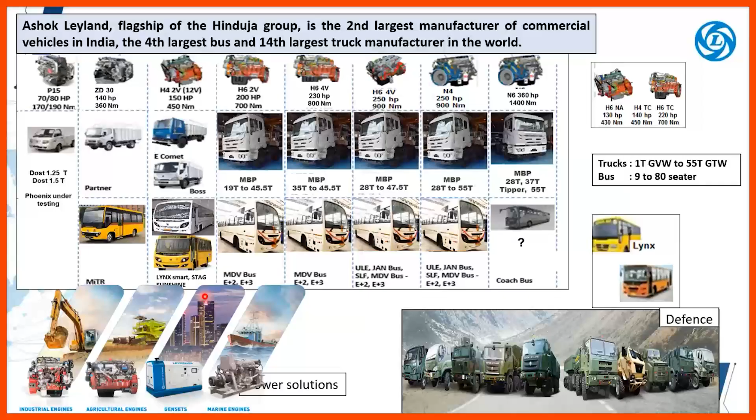So in PSB, we have four major verticals. We have one vertical for the industrial engines that goes for all the industrial applications, compressors, earth moving equipment, construction equipment, and so on. Agricultural engines that primarily go on the harvesters. You have the gensets. I mean, we give the engines to our OEMs who build the gensets around the power pack, and the marine small portfolio we have.

So now CO2 reduction. We all know why CO2 is being talked about. CO2 is a powerful greenhouse gas. It's already created a hole in ozone, and it's going to create global warming, right? That is the reason why everybody talks in terms of this language of CO2. A lot of countries, especially in Europe, have taken their internal targets, like 15% by 2025 and 30% by 2030 with respect to the 2019 baseline.

And there are a lot of technological pathways also being mentioned, how to do it. It's not just about doing what is required. It is also about how one would do it. It doesn't stop there. If somebody does not conform to that, then you can see the penalties that would be levied for non-compliance. And the penalties would sometimes make even the companies bankrupt. It's a very, very tight penalty.

CO2 reduction at an R&D level could be very easy, right? We can put a lot of technologies inside and then get the CO2 reduced. But if you take it for commercial viability, ultimately what could happen is the product cost would go up, right? And product cost going up means this is a burden on the end customer. So we should find smart ways and means of achieving the objective with minimum cost addition to the end product. So that's where the challenge lies.

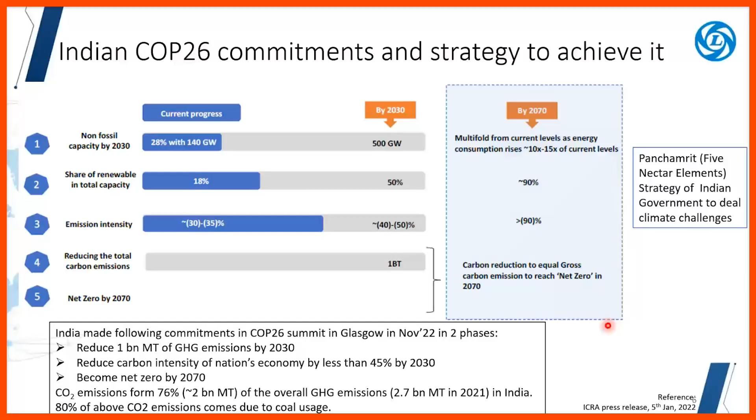At the end of the day, the fifth line item is net zero by 2070. So by 2070, the Panchamrit elements listed here will try to get us from a baseline level to net zero levels. This is a very, very challenging target. I've mentioned the reference from where these slides have been taken so that anybody who wants can refer to the authentic source.

Similarly, based on the Panchamrit, how do we do it? One is the renewables, next is the EV ecosystem. When we say EV ecosystem, availability of EV vehicles and also the charging stations and the swappable batteries and so on. Next is ethanol for petrol, E20, and ED and MD, that is a 10% or 15% mix of ethanol or methanol or even IBA, isobutanol, at 10% levels for diesels. Besides this, green fuels. Next is battery energy storage improvement, and CCS, the carbon capture and storage technology. These are all again expensive technologies.

So at the end of the day, the details are mentioned here in this ICRA report, and by following these steps, we should be able to achieve the targets set by our government.

For India, let me start with the non-powertrain enhancement. Non-powertrain is basically the non-engine and non-gearbox stuff. First is aerodynamic optimization. Most important in aerodynamics is a streamlined body. Vehicles may have a roof hat or something like that to reduce the air drag. A lot of CFD simulations are done upfront during the vehicle design itself, and then the best design for the vehicle is selected for getting the CO2 benefit. This is not very new; we've been doing it for quite some time.

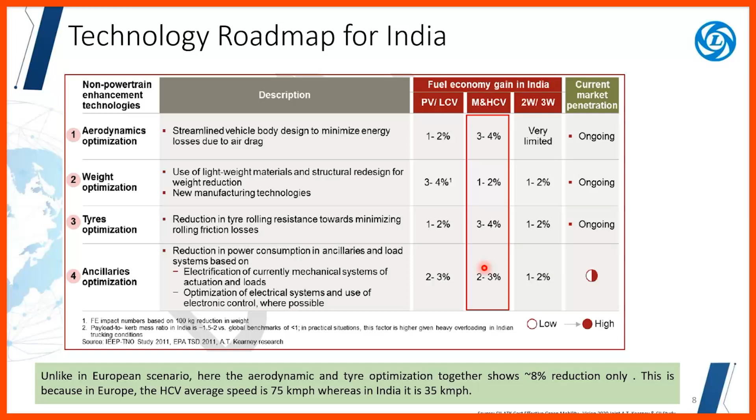Yes, sir. And now, if I continue the technology roadmap, friction reduction is a very important thing that every engine designer does. As you know, friction is proportional to the square of the engine RPM.

So if you are having a high-speed engine and if the friction levels are, somebody can go on mute, please, whoever is talking there. Hello?

So friction is proportional to the square of engine RPM, square of engine speed. So in any high-speed engine, if there is a friction element sitting inside, it's going to be detrimental and it's going to stop getting the fuel efficiency benefits. It's going to deteriorate the fuel consumption. Similarly, micro hybrid stop-start systems, then fuel injection systems. So everything will have a boon and a bane. One is the cost part of it. Next is the technological challenges in manufacturing, assembling and maintaining the same thing.

Next is downsizing. So how can you push more and more air inside the engine with a downsized engine? It means if you have a naturally aspirated engine, say for example a 4-liter naturally aspirated engine, can we go to a 1.5-liter turbocharged engine? That would give a specific power very similar to the 4-liter engine. Yes, people are doing it, and this is the idea most people are working on. How can we squeeze the maximum power out of the engine? Smallest engine, maximum power. Other technological elements like variable valve timing and variable valve lift, right?

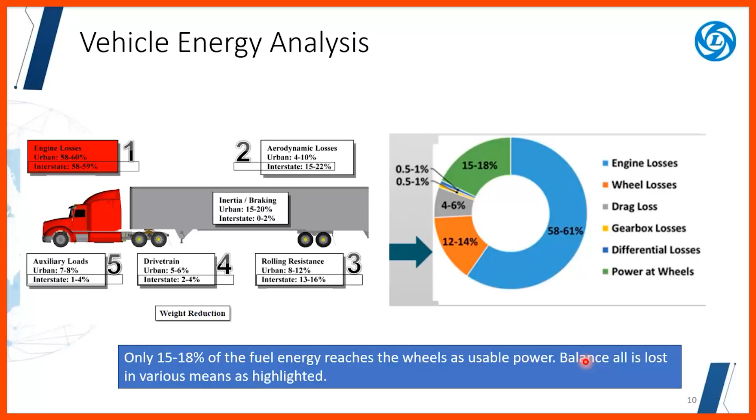And there are some resistance components that are going to eat away the hard-earned energy, right? The driving resistance, aerodynamic, the rolling resistance. There are some driveline losses. There will be some thermal losses. So it's very important how we can recover the thermal losses. So can we do something to recover the exhaust energy and again use it back? This is an Argonne Lab presentation.

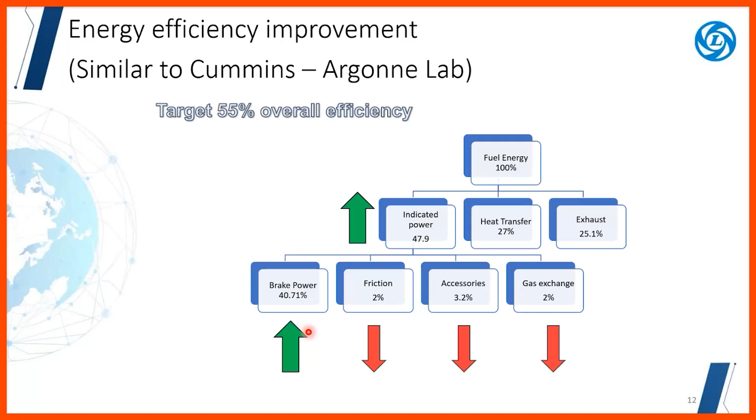So what is being mentioned here in this slide is fuel energy going to indicated power, heat transfer and exhaust. How can we threadbare analyze the energy constituents, where all this energy is going as, if I can use the word, waste, and how we can address it, and then how we can improve that wastage so that useful energy is realized, and therefore, at the end of the day, the overall CO2 gets improved.

Cummins had built a vehicle many years back targeting 55% overall efficiency. 55% is a very, very challenging number, and they've achieved it on one vehicle. There are some papers and literature available. If somebody is interested, you can go through and find out how they managed. What are the techniques that they adopted to get that very high fuel efficiency? Some techniques are mentioned here: the ORC, insulation, friction reduction, auxiliary loss reduction, the variable geometry turbocharger, redesigning the combustion chamber, very high pressure fuel injection, and taking the engine to extremely high cylinder pressures.

So there is the European standard, and based on that, what all can we do, right? This is an AVL source slide here. What they said, which could be pretty realistic, is we can achieve about 15% fuel efficiency improvement from the baseline level where we are. But for that, plenty of work needs to be done here. It's not one element or two elements that we do and it's going to give the ultimate result of fuel efficiency improvement. So there's a whole lot of activities that need to be done.

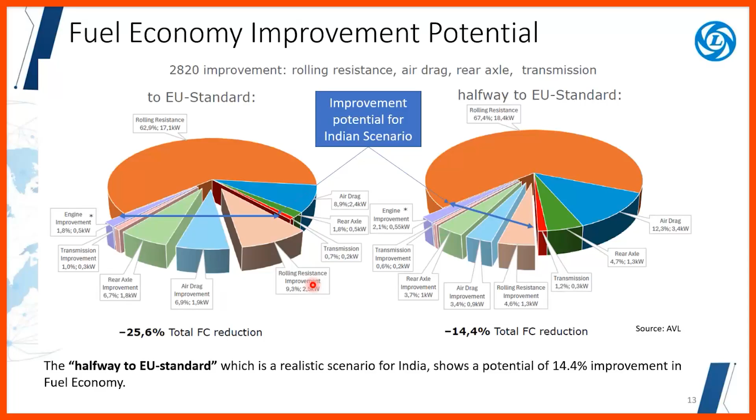And the most important is it has to be realized on a mass production level. It means we need to do a lot of consistency trials. The parts that we source, the technologies that we source, they have to be extremely consistent. Otherwise, one customer may get it, the other customer may not. But at the end of the day, when these things become the rule of law, it has to be met. There is no other option, right?

So in engine efficiency, how can we improve the efficiency of an internal combustion engine? First, you can improve the combustion and air handling. When we say combustion, a lot of software is available in the market to model the combustion and get the best combustion chamber design. When we say air handling, that also talks about turbocharger.

Have we selected the right turbocharger, right turbine, right compressor combination for the particular operation of the vehicle, of the engine? Is there any possibility that we can recover the exhaust heat, like an organic Rankine cycle? Can we recover the exhaust heat and then use the heat for some other purpose?

At the same time, you can thrift some fuel. It means there is over that, so that amount of fuel consumption can be again thrifted. So how can we reduce the heat loss? Heat loss to various sources like heat loss to coolant, heat loss to exhaust, and so on and so forth. How can we improve on the friction and the parasitic load? This is again an important thing.

At the end of the day, how can we optimize the engine-out NOx emissions? As I mentioned, NOx emissions is a direct function of your thermal efficiency. So can we do something, deliberately increase the engine-out NOx, get the best thermal efficiency, and have an aftertreatment system that is wonderfully designed so that the NOx emissions are addressed, treated, so that the compliance, everything is met.

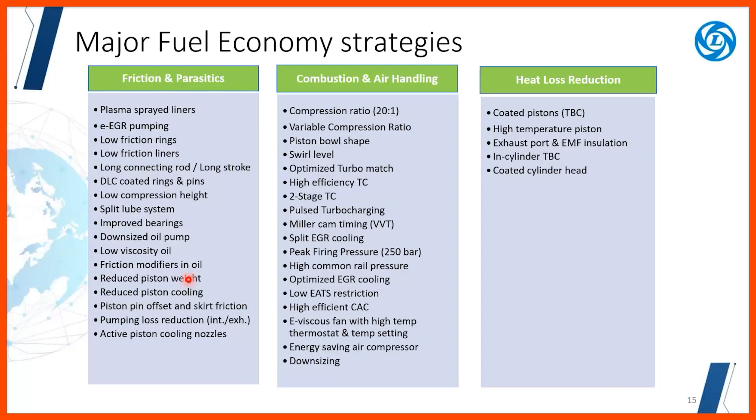And another thing is, can we use some wonderful oil? Very low viscosity, high performing oil so that the friction contribution from the viscous oil is negated. So there are many ways it's being done, but end of the day, we have to do these things, otherwise the end goal will not be met.

Again, FE concepts for enhanced BTE, brake thermal efficiency. So what all can we do? For example, there are some companies who do this. The super truck program targets 55% brake thermal efficiency using various techniques. Typically, diesel engines have compression ratios of the order of say 17, but here people are going for 20:1, so you increase the compression ratio.

Similarly, cylinder pressure, very high common rail pressure, injection pressure, and restriction in the exhaust side is very less. It means you are reducing the back pressure because back pressure is going to affect fuel efficiency. Can you do downsizing? So many ways are required here. This is an open book, you can search on the internet. And if you look at the Cummins Super Truck program, you will get plenty of information on the internet also, so that we can revisit these ideas later.

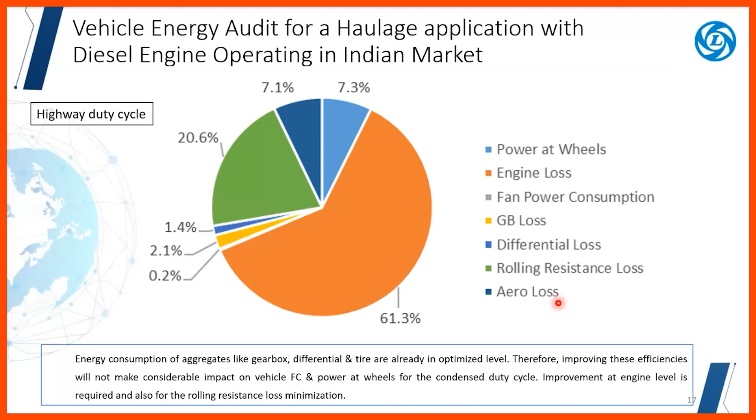If you typically look at a haulage application market, and a diesel engine is operating, typically the power that is coming at the wheels is very less. A lot of losses are going on. So every single component in the engine, in the gearbox, that's the transmission, in the propeller shaft, in the differential, and in the tires, everything has to be addressed. Not just the drivetrain, also the aerodynamic losses and the overall mass also has to come down.

So this would require a complete collective effort at an organizational level to realize these benefits. And similarly, once we do that, improvements can be realized, yes, but one may not get an improvement of say 15%, 20% levels. Even a 4%, 5% improvement is a big number in these activities.

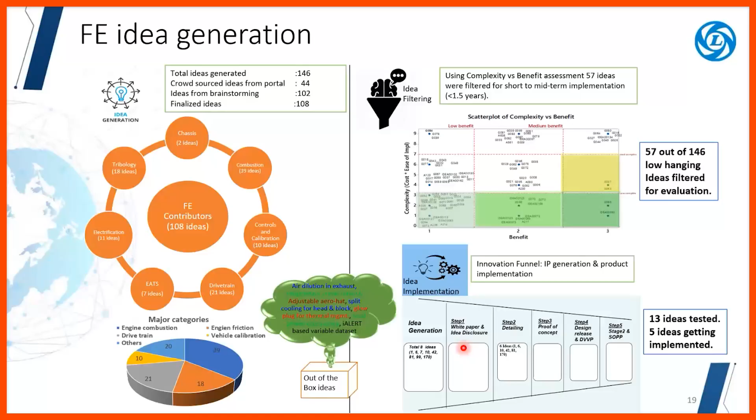So in Ashok Leyland, we have a fuel efficiency idea generation tool, an idea generation platform, where the ideas are collated and then classified based on the complexity and benefits, and based on that, it goes into the various stages of implementation.

Similarly, there is another technology called Jet Controlled Compression Ignition technology, that is called JCCI. What they do is have a small separate injection ignition chamber engine. You have a small gas, an LPG gas going in here, and there's a spark here, so it's kind of a pre-combustion. The main combustion happens here. This will definitely give the advantage of homogeneous and heterogeneous combustion, but end of the day it's going to add cost, because the diesel engine will again have to carry a spark plug, a separate LPG fuel, and a line.

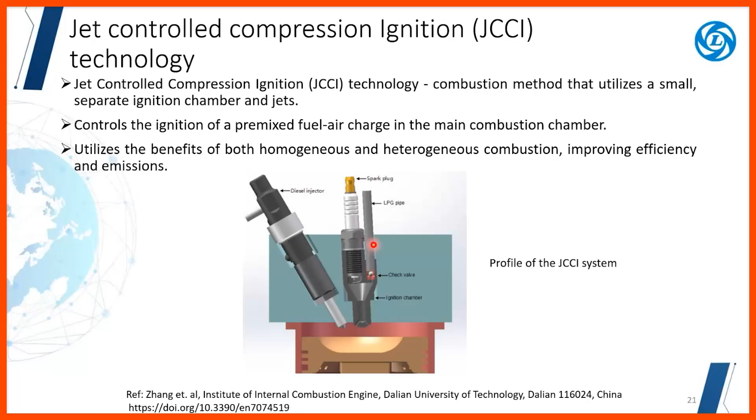Look at the controls, what controls and all we can have today, or what are we having today? In the BS3 emissions, people used to do with a mechanical fuel injection system, completely mechanical. So when BS3 became BS4, a little bit of electronics came. Electronics means the common rail system had come, so people had to understand the wiring, the electronic sensors, actuators, connectors, and so on and so forth.

In the BS6 regime, it is not just the electrical, electronics, instrumentation, control part, it is also the chemical part of it. When we did BS6 in 2020, All India BS6 was launched in 2020, the engine and the after-treatment system was equally complicated. So every mechanical engineer who in turn turned into an electronics engineer was again reading the chemistry books and literature to understand what is this chemical part happening in the catalyst.

What is this light-off temperature? What is this phenomenon of, say, thermolysis, hydrolysis in urea? Then what is this regeneration? What are these various kinds of deposits that sit in the SCR? How can we break them and all those things?

And what are the models that we can develop and adopt in the after-treatment system so that you need not depend on the sensor all the time? You should have a fail-proof system. If the sensor fails, what is the alternate?

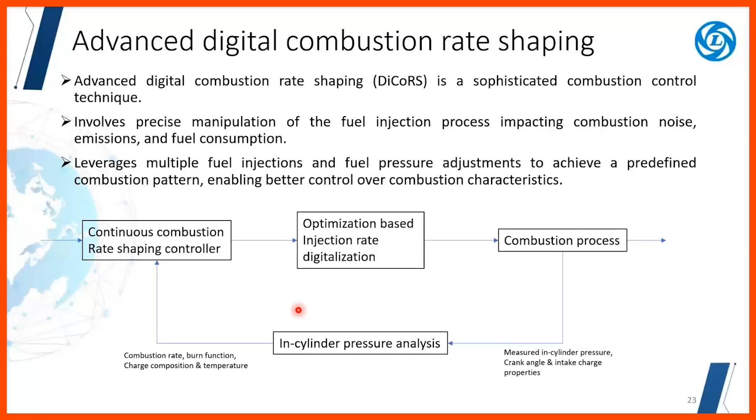If you look at where we have started, 2020, when I said BS6 in Ashok Leyland, we had the baseline IC engine, we have electrification as also CNG. So 2021 to 2030, we call this a decade of transition. All sorts of fuels will be available, all sorts of environment will be available, ecosystem will be available, and that's what the market demands.

Greater than 2030, nobody knows, right? So what is the fuel? There are talks that diesel may not continue, and there are also talks that Europe is going to reverse the 2035 norms of banning the ICEs. Nobody knows what's going to happen now.

But the message here is we have invested in development of all the product portfolio available, and whenever there is a demand from the market, we can suitably adopt the product and then deliver to the customer. End of the day, we have to meet all these things.

As you know, today 86% of our crude is imported. So can we do something for crude import substitution? That is the reason we are working with biofuels, like ethanol, alcohol based, and biodiesel and so on. So that will contribute to a reduction in our import bill.

Again, if you look at the alternate fuel initiatives we have taken, right from 1994 till where we are - we've been a market leader in using all these fuels, and we have demonstrated a lot of vehicles for demo purpose, for R&D purpose, and also for commercial purpose.

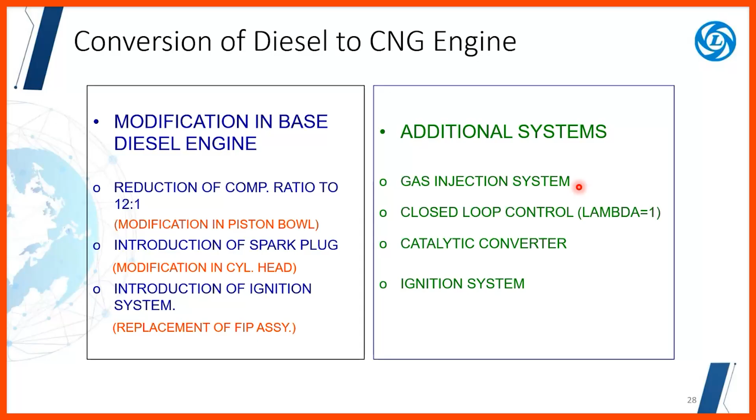It is going to be expensive, right? It's going to be expensive, but it is not impossible. We have done that. And again, from CNG, right from first generation BS1 to today, we are in BS6. What are we doing in BS6? It's stoichiometric plus EGR. We have, of course, electronic closed loop control. We have OBD2 and IUPR monitoring, and emission durability is also mandated. And BS7, nobody knows when Euro 7 is going to come, probably 2029, 2030 or 2027 or so. But again, we are ready for that.

And someone earlier asked, typically what would be the changes? Other than the engine level, if you look at the CNG engine, the electrical part of it, wiring, fuel system, cooling system will change. The controller will change, the program is going to change. Of course, the modification of the vehicle chassis to take all these tanks will change. Then the aftertreatment system is going to change. Sensors related to CNG will be changing. So it is not impossible. We have done similar things in the past, for hydrogen also.

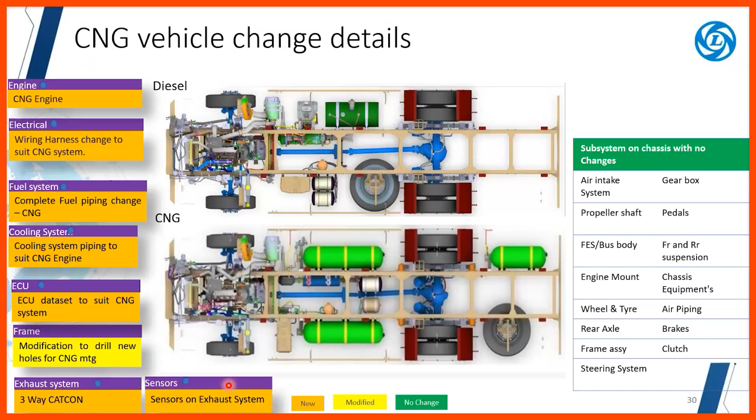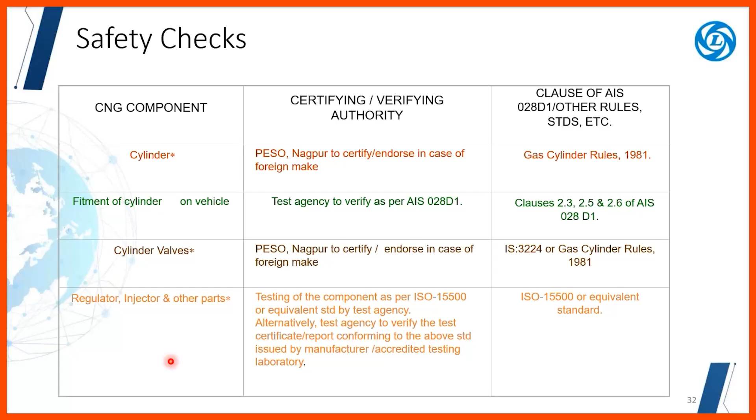And a quick glance into the legislation and the safety checks. Once we do this conversion, naturally all these items need to be certified. There are competent agencies to which we have to submit the vehicle, and they will perform all these tests at whatever standards are prescribed. And then we have to get it type approved. Type approval is for any fresh product that we do. We also mention here which agencies typically do it. The cylinder is done by PESO, and so on and so forth. This is probably of little interest to you.

And CNG infrastructure, this is from our facility in Ashok Leyland. Where the CNG cascade arrives, how these cylinders are connected, the cascades are down, the gas release, and finally it goes to the engine at whatever prescribed pressure.

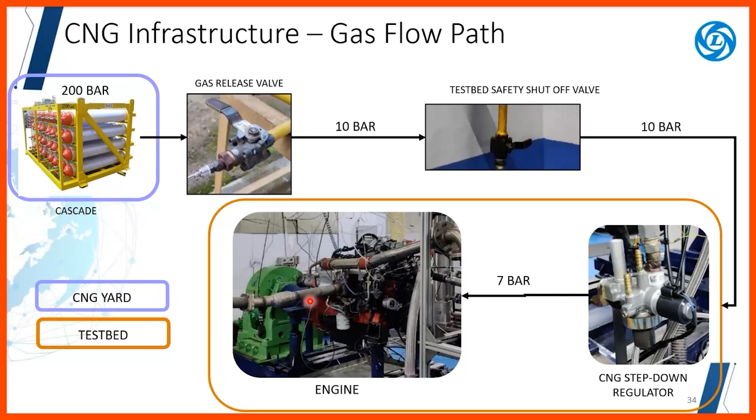And again, LNG. The difference between CNG and LNG is especially in the tank part of it. We need to have a cryogenic tank, a heat exchanger and a regulator. Other than that, it's all a CNG engine only. So LNG naturally will have a better range at the vehicle level. A bigger tank can take more gas, and therefore it can cover more kilometers. That's the whole purpose of going for LNG. Otherwise, the principle is very similar to the CNG portfolio itself. And coming back to the LNG fuel layout, this again is commonly available information.

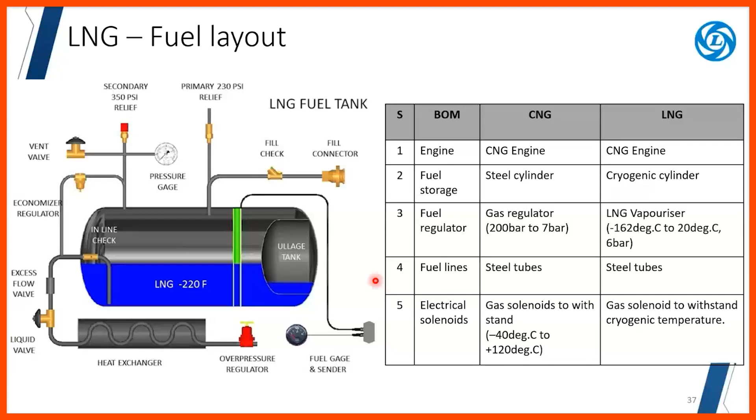Again, LNG, we run some LNG intercity buses. The size of the tank is very big. As I said, we maintain about minus 162 degrees. That's the tank temperature. Therefore, we need a heat exchanger. It's in liquid, right? We need a vaporizer, regulator, and then it goes.

So for those of you who are not aware, I think most of you may be aware of it, methane is an even more powerful greenhouse gas than CO2. I think methane is about 80, 90 times as potent as CO2. It stays in the atmosphere for quite a long time. So the greenhouse effect will be longer in the case of methane. So any unwanted methane exhaust, or gas that is not burned properly, is all regulated. Be very careful in doing that.

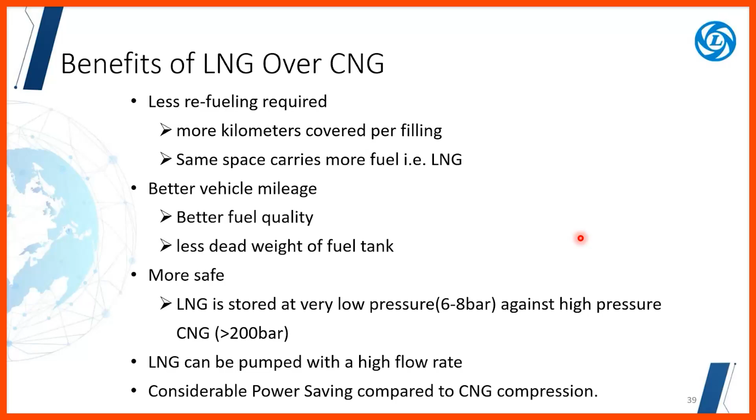Again, what are the benefits of LNG over CNG? As you said, the range is better. The space: as it is in liquid, you compress more and then you carry more fuel. So that's the biggest advantage. Even now, there are a lot of LNG tanks running.

So as I mentioned sometime in the past, like a hydrogen engine, right? A typical conversion. So how do we convert a diesel vehicle to a hydrogen vehicle? Again, the critical elements will change, right from the engine. You need to have a tank, all the wiring, so on and so forth. So as I said, we converted more than 20 vehicles on this route, and these vehicles are still running in our country.

So when our engines are being designed, we say it is a fuel agnostic engine. So naturally, the cylinder head would undergo a change, because a diesel cylinder head cannot be considered for an SI version. So when it goes for an SI fuel, the SI based architecture will come into place. But nevertheless, all other components will remain the same. So that's the beauty of this fuel agnostic engine, with bare minimum changes. Right from the design stage, it's conceptualized so that the usability of the engine for various applications is well forethought.

So again, if you look at the hydrogen engine unique components, the bottom row is your hydrogen engine, and naturally the injection system is going to be different. The ignition system is going to be different. As you know, hydrogen has the highest flammability limits, right? 4 to 76% is the flammability limit. I think diesel is around 9 to 11% or that range. So it requires extremely low energy. So it's very important that we have a plug and a coil that carries the minimum energy required to burn the fuel.

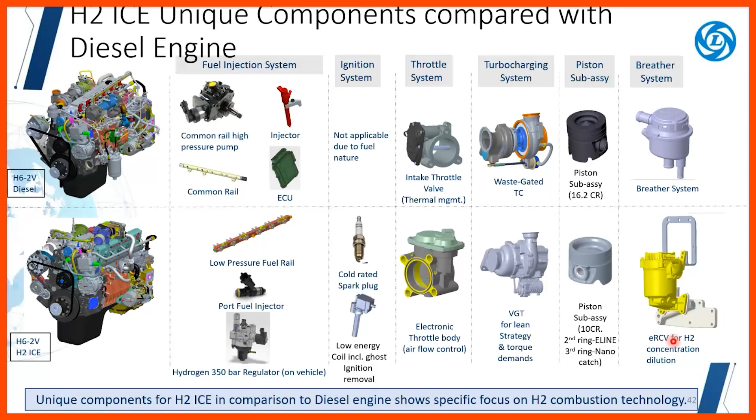It's an unbelievably lean fuel, and the combustion chamber will change. Therefore there are some mandates that the crankcase has to be monitored, because the hydrogen concentration inside the crankcase at any point in time should not exceed 4%, because beyond 4% hydrogen can burn if there is a source of heat or energy. So there are techniques and technologies available to positively vent the crankcase while maintaining the hydrogen lower than 4%.

So this is one of our hydrogen engines we displayed more than 2 years ago at the Auto Expo. The engines are undergoing a lot of durability tests at the engine dynamometer level and also at the vehicle level.

Some changes we mentioned. So people say that this is going to be the fuel of the future, but I foresee three challenges. There will be some challenge in terms of developing the engine. It's not as easy as CNG or diesel, but of course this can be learned and applied, and we can overcome this. But the three main challenges I foresee are the availability of fuel, the transportation of fuel, and the storage and handling of the fuel.

So these three things are primarily the challenges for hydrogen. I think today hydrogen is about $5 or $5.50 per kg. I think if the price drops down to under $2 per kg, then it would probably be matching diesel levels of economics.

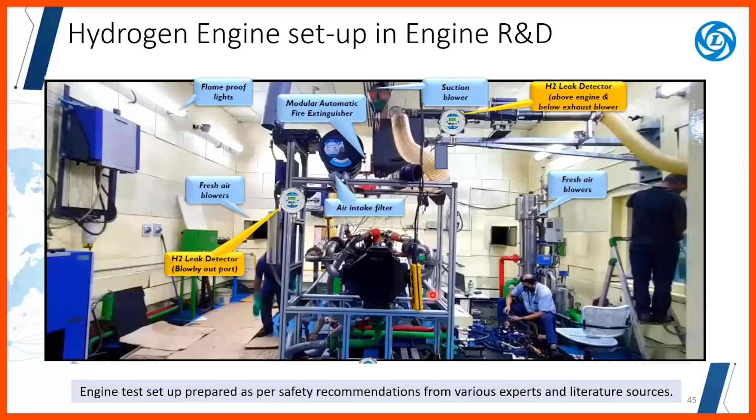So the cost of hydrogen fuel, you said somewhere around $5. But how about fuel efficiency on the vehicle? We can match diesel levels of fuel efficiency. Okay, this again is in terms of kg, right? See, hydrogen is the lightest fuel. For instance, a big 300 bar tank typically carries about 250 bar of hydrogen. That is roughly 2 meters in length and about half a meter in diameter, and it would take about 8 kilos of fuel.

So that's why people go for 700 bar tanks. I think in India we don't have approvals for 700 bar tanks, but in Europe it's there. So a 700 bar tank is going to be a Type 4 composite cylinder. And I don't think we have Type 4 manufacturing in India. Probably my information is old; maybe somebody is doing it.

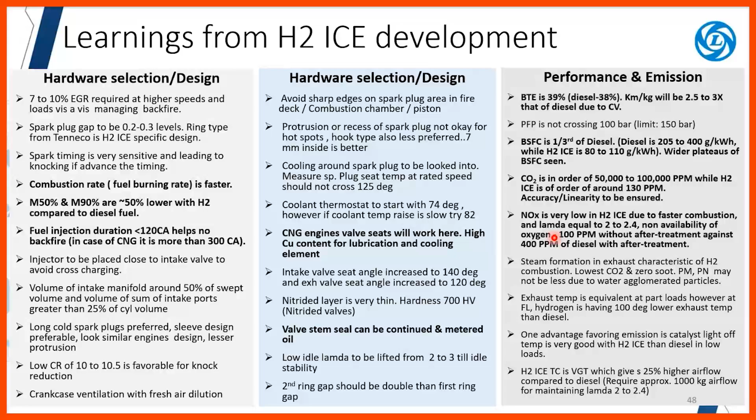Again, a lot of learnings from the hydrogen internal combustion engine development here, right from the hardware design selection, and again the P&E, the performance and emission. The NOx levels will be very, very low; at very lean lambda, say 2.2 levels, you'll get single digit ppm of NOx. That's very pleasing to see, extremely low levels of NOx.

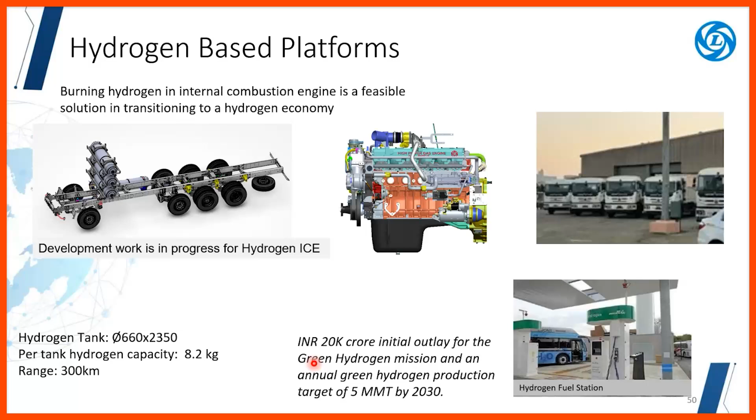So this is typically how the tanks are installed right behind the cabin. In this example, 3 tanks. Sometimes a fourth tank and a fifth tank can come here. A tank roughly 2.3 meters long and about 660 millimeters in diameter can hold about 8 kilos, with a range of some 300 kilometers. These are initial figures, and they will only improve. But today, if the ecosystem is available, we can go for this fuel.

So again, some thoughts about fuel cells. Why I brought the fuel cell here is, as you know, the challenge with the fuel cell is the purity of hydrogen. People say a fuel cell requires 99.9999 levels of purity, and the air has to be extremely clean, with extremely clean filtration. But in an internal combustion engine operating on hydrogen, even 98% purity is okay. So we need not go for the extremely high levels of purity needed with fuel cells.

You are referring to Six Sigma?

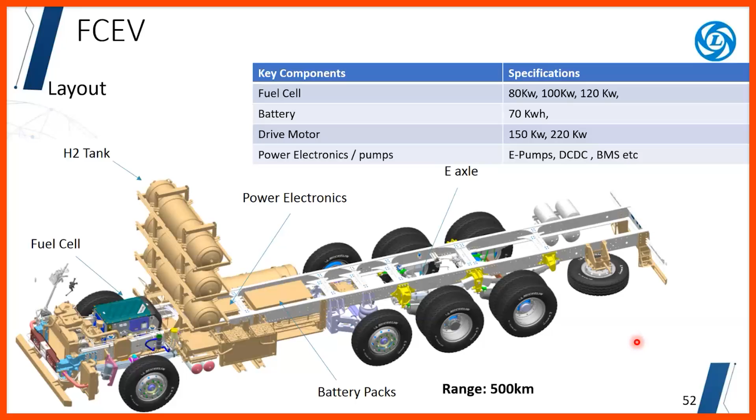Yeah, sort of. So if you look at fuel cell vehicles, we have the typical architecture here. The fuel cell will be sitting somewhere over here. We have the tank and some specifications. In fact, we are operating a few fuel cell buses in the Ladakh Leh area, a government project we are running there. So this is what our typical bus architecture looks like in the case of fuel cell.

And another couple of slides on EV vehicles. Today when you say EV, the battery is only a storage device. It does not generate energy like a fuel; it just stores energy. And unless the entire well to wheel is taken care of, the holistic concept of green may not come here. Our country is also going very strong in battery manufacturing, localizing in India so that dependency on other countries comes down. I think I'm on my last slide.

The medium and heavy commercial segment. So CO2, what is CO2 standard? We touched upon what is CO2 standard and why and how it is important to understand the various sources of losses in a vehicle and how we can address them. So how we can improve the brake thermal efficiency, how typically the idea generation program works in terms of fuel efficiency, and then what are the advanced combustion improvement techniques that are available and which can come in handy to improve engine efficiency.

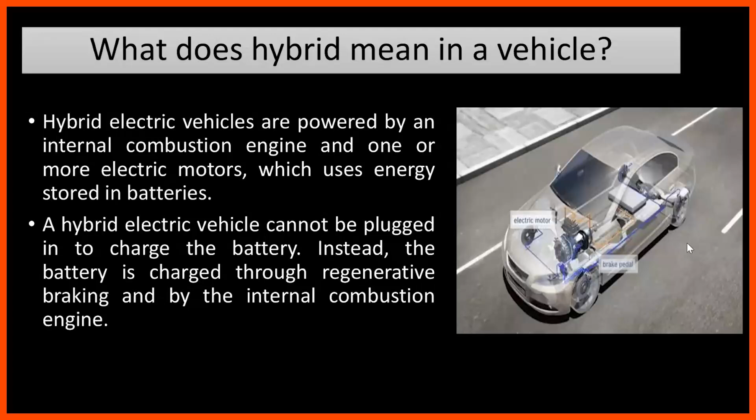Next, EV is nothing but a Tesla. So for easier familiarization, it's a battery vehicle which is completely on a battery, and thus it has mechanical components as well, like suspensions and the steering component.

This is because of the MDPS and the electrical assisted power steering system, which every vehicle is using in day to day life. Now the technologies are improving where we are going with drive by wire system. So the emerging system is moving from mechanical components to partially using an electrical system to assist.

Now it is wireless transmission. You can see bikes, KTMs, and many cars having throttle or accelerator pedals with a cable, or without a cable using a sensor. It just acts upon the resistance, based on how much the pedal is being pressed.

Now, eliminating the mechanical links makes the car or the bike lighter. The electrical values are very accurate, as well as efficient and instantaneous. That is how you achieve the speeds in day-to-day vehicles.

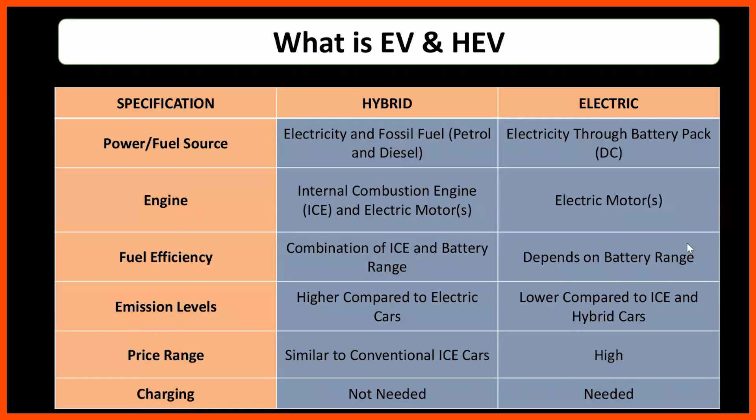Hybrid is not only with electric and petrol. There are biodiesels, ethanol fuel, hydrogen fuel cells, natural gas, and propane among the options. Propane is a readily available gas which has also been used.

Natural gas - now slowly we are using green gases, and it is significantly reducing the cost compared to petrol or diesel. Hydrogen fuel cell is a developing system which leading markets like Toyota and Hyundai are working on, but that is still in the future.

Biodiesels are renewable, which have already been used, made from cooking oil and other biodegradable materials, and natural gas. Ethanol fuel is also made from plant materials and corn.

So there are many alternative fuels, but due to availability, we go with electricity because India is the third largest leader in lithium ion production. So abundant lithium ion is available in India. That is the reason the world is focusing on electric vehicles and battery development in India rather than elsewhere.

Also consider the life cycle - if you have a hybrid, the expected lifetime is not more than 15 years, because either you have to replace the battery, which costs nearly half the price of the vehicle, and that has an ownership cost too. But during ownership, you aren't spending immediately or at intervals - it's a one-time cost where you replace the battery.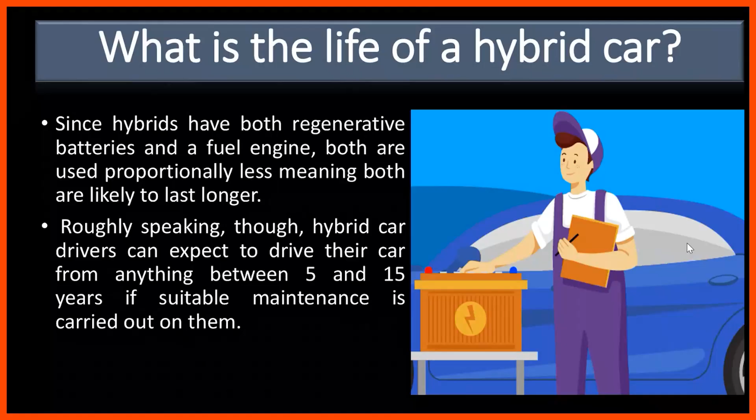So comparatively, the cost is similar owning an ICE engine versus a hybrid, but the cost of maintenance of hybrid increases with insurance, since electrical components are often not covered, or a small defect in an electrical component can lead to major issues in the vehicle. So disadvantages include cost, economy, and insurance rate.

The hybrid vehicle's fuel efficiency also has minute slack in that. On a combined basis, the BMW i8, a sports car, gives you 48 kilometers per liter mileage. A Toyota Hyryder gives you more than 28 kilometers per liter, and there's a customer, published by Toyota, who achieved 35 kilometers per liter on the hybrid technology system.

Whenever you are at slower speed and braking, the hybrid technology retains the battery, and when moving at slow speed, the electric motor assists in moving rather than using ICE engine power. So combined, you get mileage significantly higher than normal ICE engine vehicles. That's how it has other advantages, though equally it has disadvantages as well.

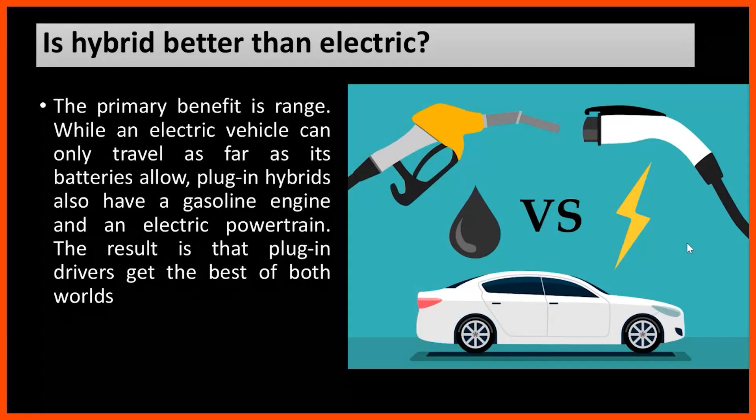So it depends on the people who go for hybrid or electric. It is purely based on usage and needs.

So there will be a few questions which we will be addressing at the end of the session, like are hybrid cars good? You will come to know these questions as you go through these slides at the end of the session. Participants can make a note of this. And in the end, if you have any doubts and still not got the answer, you can put it up to me. I can give you clarity.

Are hybrid cars good for long distance? How long do hybrid cars take to charge? Do hybrid cars turn off and stop? Which is cheaper to run? What happens when a hybrid car runs out of fuel, and vice versa? How long can it go without gas? At what speed does hybrid use gas? What happens when hybrid runs out of battery? Do hybrids need lots of maintenance?

The last question has been answered. Hybrid cars also require maintenance since they have an ICE engine, but slightly lesser, because the duration of service intervals are higher compared to normal ICE engine vehicles.

So is electric the future or the present? It depends upon the adoption. If you see the requirements of a consumer, the first thought that comes is cost.

If you or me as a consumer go to buy an electric vehicle, I think about the cost, how much I'm going to invest. What is my charging time? If I buy a vehicle, how long should I put it on charge? And what is my battery range if I put it on charge? Then if I run out of battery, where can I charge? And then I will come to the vehicle type. So this is a requirement in the consumer mindset. So for anything, let it be a mobile phone or anything, people think about what is the cost I'm going to put in, what charge time it is going to take, and what range it is going to deliver. So this comes into the customer aspects.

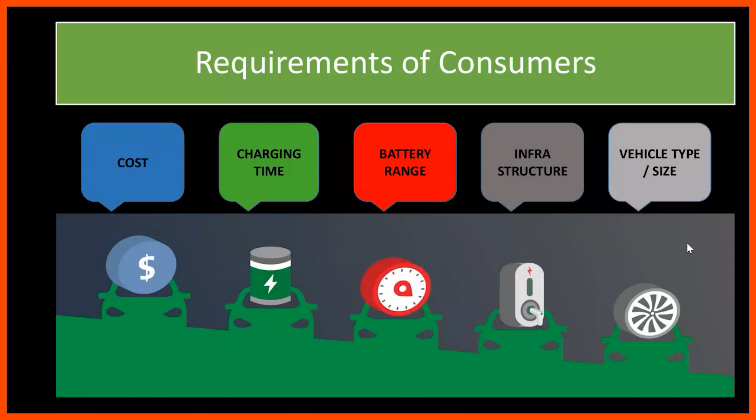If you go to the compound annual growth rate, from 2017 to 2022 the compound annual growth rate of electric and hybrid vehicles has grown to 13.4%. The adoption has increased. You can see the adoption compound annual growth rate in the electric vehicle market globally. And the Indian electric market...

From 2017 to 2025, it has grown by 34%. You will not trust me, I took this data 2-3 years back, almost 2 years back, and it is still the same. So that was a prediction - we thought how electric would grow, and now it is there. So 30% of the Indian market is electric now, and that is how we are progressing.

And this is the consumer thought we saw. But when you go for the fleet manager, which is the manufacturer, the manufacturer's aspect will differ. If we are going to build a vehicle, what is the range we are going to define for it? Then, if I'm going to give a vehicle with a 100-kilometer range, what is the size of the vehicle?

Surely it should be a two-seater or a one-seater bike only. If I'm giving a vehicle with a 400-kilometer range, I should think about a larger size vehicle. Then for 100, I should think about the size or type of vehicle, because the battery depends upon the weight ratio and the loads and external components I'm going to add on the vehicle. Surely the battery range decreases, so I should have a battery which can deploy 200-kilometer range. After putting all the chassis, structure, everything, it should still deliver 120-kilometer range, because the remaining goes as a loss - friction loss, mechanical loss, weight loss, multiple are there. So excluding the losses, it should deliver.

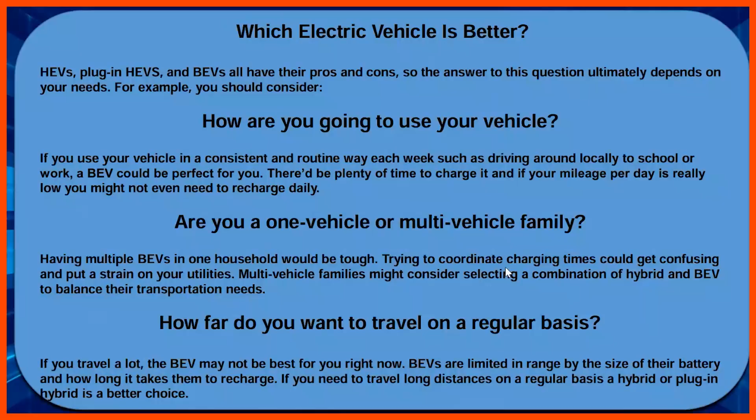So hybrids, we see three types. What are the types? Based on the transmission of power, the power transferred from the engine to the battery or battery to the wheels and vice versa. First, on the classification on powertrain arrangement, we say series, parallel, and split or mixed hybrid. If it is the hybridization term we are speaking about, we say micro hybrid or mild hybrid, plug-in hybrid, or battery electric vehicles. So these are both similar classifications, but in terms of powertrain these are the split array classification, and based on hybridization these are the classifications.

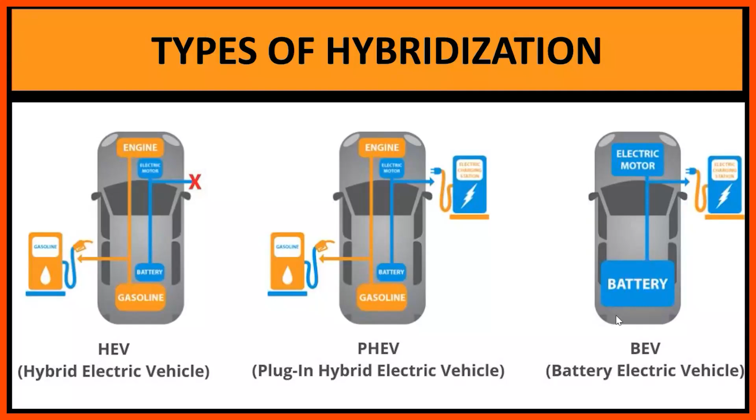On the hybridization side, you have a fully hybrid vehicle, as seen in the initial slide, where gasoline is the main power and battery is the secondary power, and you cannot charge the battery externally. A plug-in hybrid is where the battery can be plugged in, and you can also fuel the car - so two sources can be filled from outside. An electric vehicle is a complete battery vehicle.

On the technology front, there are videos online that elaborate on how the electric motor is mounted to the flywheel in hybrid vehicles, and how it assists in pedaling. You can see Maruti Ciaz as a good example because they have integrated two batteries in the vehicle - one for the complete hybrid system and one for the auxiliary lights and interiors. So now, how this works: when you are stopping at a signal, the countdown starts, and when your gear is on neutral and you are stopped at the signal, the vehicle speed is zero.

The count starts internally at the ECU, and if you are stopping for 120 seconds, the car automatically shuts off. The engine completely shuts down, but your AC remains working. This is in a hybrid system. When you are moving from the traffic, you just have to press your pedal, and the car starts again automatically.

This is assisted by a hybrid system which uses a secondary battery to start and stop the engine to conserve fuel. It also assists the flywheel in climbing steep locations or in times of push power where you need a higher load. A good example is your government buses. On a signal after stopping, if they want to take a top gear, the accelerator is pressed so hard for the engine to slowly struggle and move.

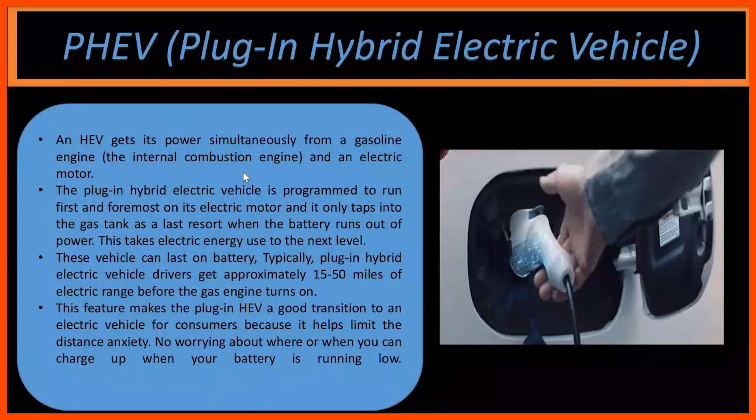There are a few terminologies in electric: EV, BEV, regenerative system, hybrid, plug-in hybrid, neighborhood electric vehicles, and extended range. We would typically have come across neighborhood electric vehicles, but not known they are EVs. If you are in Bangalore, you would have seen Yulu and small electric cycles, which go at a maximum speed of 35 to 40 and carry one single person. It looks like a cycle. Those are neighborhood vehicles, with limited speed and limited range.

Coming to the regenerative system, I want to emphasize and explain in depth how it actually works and helps in an EV. I'll give you one scenario. Imagine you are driving on a stretched, empty road. When people see an empty road, they obviously accelerate. Your bike has reached 80 to 100 in less than 10 seconds, and suddenly, at 50 to 80 meters, you see a signal or someone crossing in front, and you suddenly stop the vehicle.

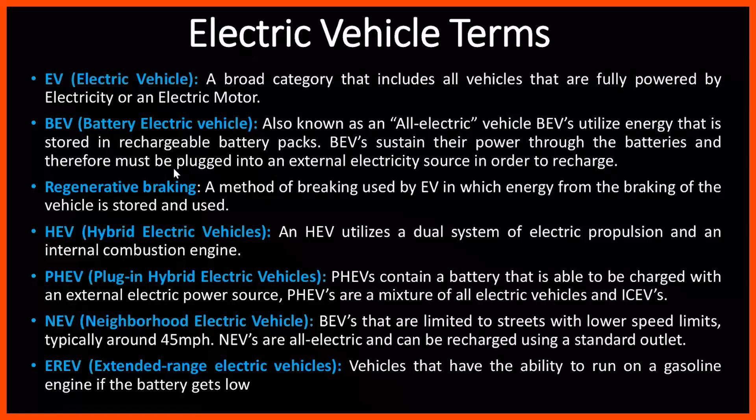That is why in the new EVs, whenever you apply the brake, you find it very sharp, because the regen system is already slowing down the wheel through the motor and the belt drive, chain drive or gearbox. But still, applying brakes stops the regenerative system as well as the vehicle at that instant. So that is how regenerative braking is helping out in electric automobile technologies.

And one major problem for EVs is the charging infrastructure in the country, where we are not that established to have charging stations. There is range anxiety, and still people are depending on fast chargers. Also, we have natural calamities like floods.

So we cannot have good charging infra. Even the planned charging infra will be outside the state or on a highway, where it is not feasible for many locals who are buying a two-wheeler. So only for a four-wheeler on a highway is the charging infra good, because it is kept on an elevated surface where it is not affected by floods or any earthing issues. But within city limits, setting up charging infra requires a lot of safety precautions.

So on the charging front, you have three types of charging: level 1, level 2, and level 3. There are a few more types in depth. Level 1 is nothing but your home charger, where you plug in and use your common electrics. Level 2 is something higher, which needs a separate external installation for that specific charging voltage, completely for your EV. Comparatively, it will make your charging 5 times faster than your slow charger. So that is charging level 2.

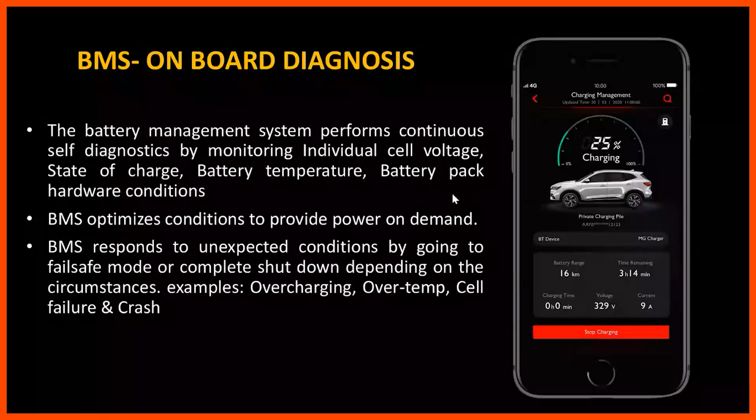And also vehicle communication control system. Whichever we saw in ICE vehicles, now it has grown up in a deeper way, where you have electrical control, power inverter, traction motor, a DC-DC converter, and a charger. Many people will not know why we are using a DC-DC converter. So in EV, we have a battery which is 3.4 kilowatt of battery, which supplies the power to the motor, and the MCU handles the power supply to the motor, and the BMS handles the power transfer from the battery. So these are all controlled.

But still, in a typical bike or a scooter or a car, we have horns, we have indicators, we have small electricals which is 2 volt, 5 volts, or 10 volt. The entire 3.4 kilowatt of battery cannot be supplied. So this DC to DC is a step down which reduces the current based on the requirements and transfers it to the required component. Otherwise, it can have a short circuit or component failure because of the high current voltage.

Also, you have a safety protection system which is inside of a battery management system. The typical, the costliest and the very technological thing in an EV is a battery. So the main thing is to protect the battery. So the safety protection will be in the battery management system, which keeps on monitoring the current, the voltage, the temperature of the battery. Once it sees the battery temperature is rising, it sends a signal to the electrical control, and the data acquisition also sends a signal to the user interface that the battery temperature is high, which you see on your screen or your odometer or your TFT display.

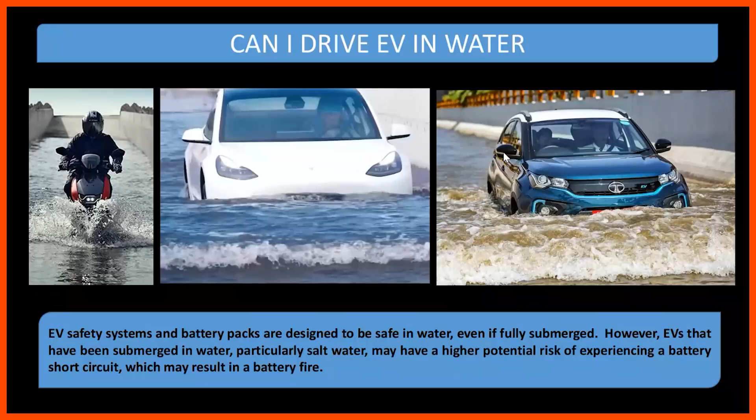So, for example, your motor MCU is there in the front, which is connected to the motor. Ingress protection 67 and 68 can resist the water entering into the couplers for half an hour. But beyond 3 meters, the pressure will be high, and water can enter the couplers. So this will affect your circuit pins, and it can have a chemical reaction which may cause a short circuit.

Also, if you go on explosion risk, what will happen? First, starting with the impact. You can see crash tests of multiple EVs which all the manufacturers are highlighting. If you have a crash, first your car will crash and there will be penetration. Now thinking about the battery. If there is a crash, surely the battery has been crushed or the battery pack is deformed. Maybe it could have been. If it has deformed, the battery is penetrated or it has been bent.

Okay, maybe it can have a short circuit, an internal short circuit, due to which there can be a leak of charge or overcharge. Due to overcharge, it can have heating. If it is crushed or penetrated, it is a mechanical abuse which will deform your battery and cause separator tearing, which can cause an internal short circuit.

Or else, if there is an overcharge or discharge and internal short circuit, it can have an electrical abuse to your battery, which will also cause an internal short circuit in a major way. Overheating due to this impact can also cause high temperature and collapse of the separator, because there are grids separating the battery cells, which can also cause an internal short circuit. These are your anxieties when it comes to explosion risk on EVs.

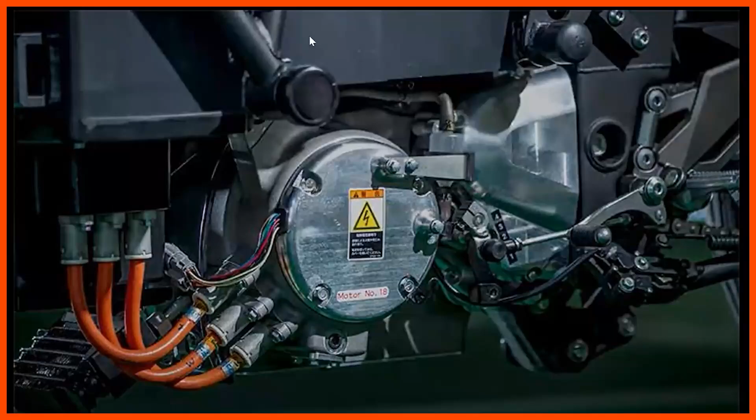And when it is running on the motor, the output shaft disconnects the engine flywheel through the clutch assembly so that the pistons are not moved when the vehicle is running on electric. So this is how it splits up. And the complete setup looks like this. You have a typical output shaft and a sprocket, but a motor also inclined to the engine, at the bottom.

This was the Ultraviolette which you are seeing now. It is an Indian made electric super bike, we can say, because its top speed is 150 kilometers plus, and it has a top range of 300 kilometers on a higher variant. This bike is the Ultraviolette F77, with 150 plus top speed. On a single charge, the base variant can go up to 150, and the top variant will go up to 300 kilometers.

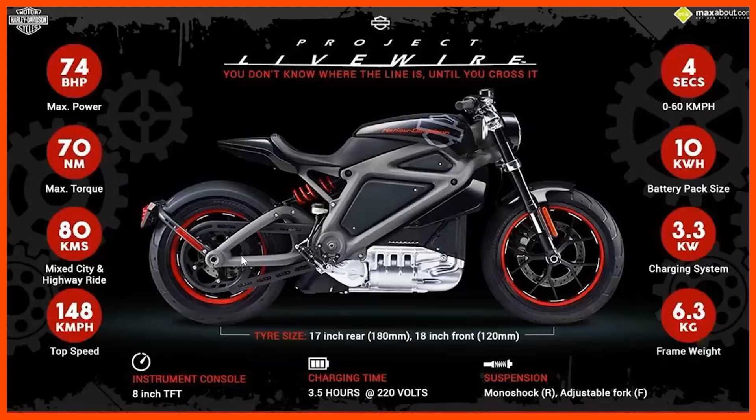You also have a Harley Davidson LiveWire, which is an electric bike. It has a range of 80 kilometers max in city and highways, which is a limited range, but still people go on it for comfort, and there are still EVs with a lesser range.

And now I'll go with the day 3 one. This is the growth and revolution that happened, and there are still companies working on hybrid systems and full electric powertrain systems in automotive especially. That is why you are seeing more adoption in India for electric, as well as in European countries. And China is one of the major contributors for EVs, where you can hardly see any ICE engine vehicles, and they prefer cycles instead.

Now we move a step forward. We have seen typical two-wheelers, four-wheelers, and commercials in electric and hybrid technology. Have you seen any hybrid system in Formula One? Formula One has Formula E, which is electric formula racing. The regenerative system alone drives 60% of the car, because in Formula One the driver reaches peak power at every corner, up to 260 speed.

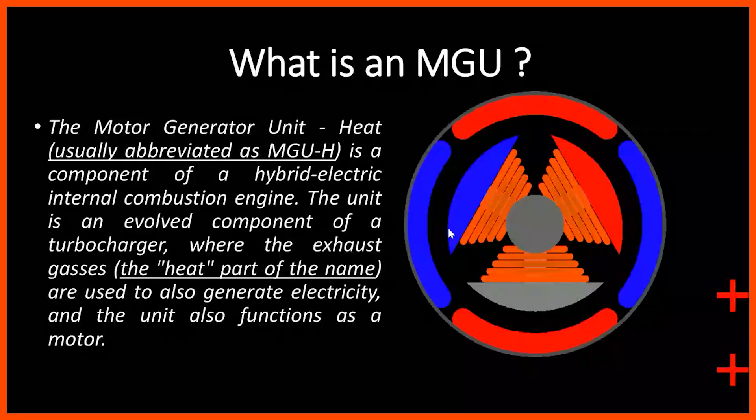You no longer need to press self every time. A self motor is not there, so your maintenance is reduced. Whenever your vehicle stops, the engine turns off, and when you press any one of your brakes, power from the battery goes to the magneto and starts the engine automatically. You can't feel the self motor working because the engine itself starts automatically - there's no external motor cranking the flywheel. So vibration is reduced, component maintenance is reduced, and the battery's lifetime has been saved. That is how MGU works.

Typically, like any electric motor, electrical energy is converted into mechanical energy through the power system. And we have a generator that converts mechanical to electrical. At times, when the motor isn't supplied with power, like a magneto, when you release your thumb, it freely rotates - that mechanical energy is converted, that's the generator. An electric motor is when supplied energy, electric current is converted into mechanical energy. The armature core is for holding it - these are the standard terms.

In AC and DC, we have different types of motors used across the industry, especially the DC stepper motor. There are various motors, but this DC stepper motor has an important application.

AC motors have been widely used. All electric vehicles use AC motors, not DC motors. This is because AC is lower cost and uses less current than DC. If you have a DC motor, you cannot achieve an extended or higher range for electric vehicles - AC current only allows you to reach higher ranges. That is why every EV uses AC motors.

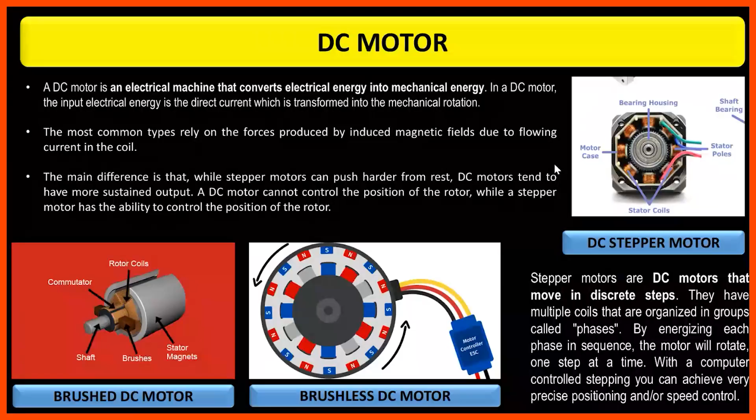So this is how we explain to all the minimal technicians, who may not even have a 10th or 8th standard education, how to grasp the electrical systems, for easy understanding.

Now, this is your motor and generator, and how we are integrating it onto a flywheel. It is called a motor generator.

Now, when you go for a higher end EV vehicle or a hybrid electric vehicle, these windings are not sufficient to charge the bigger batteries. Then we go in a reverse way where your magnet will still rotate in the center, but your stator becomes the outer surface, whereas in smaller engines you have the magnet over the stator. Here your rotor will be a magnet which is inside the stator. So now the increase of copper windings will generate more current, which will be sent to the inverter, which steps up the current and then charges your battery.

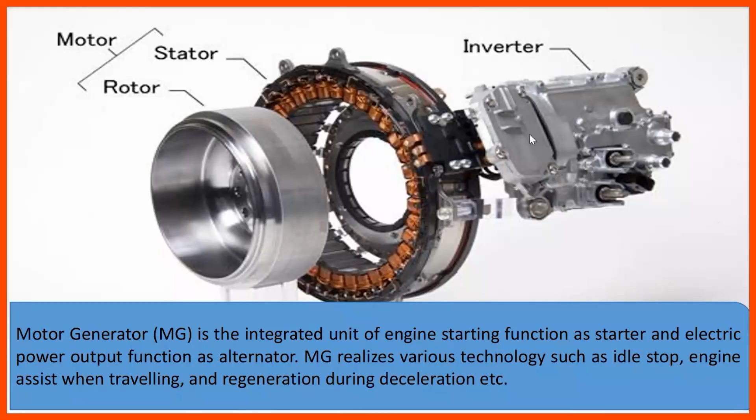So it is mounted on the dual mass flywheel. So over this, the magneto coil, this is how the MGU gearbox works. This is an image from an Audi Q7, a hybrid technology in F1.

Coming to the main topic of it. So when we speak about F1, we see power, we say performance, we say increased horsepower, and we say lighter weights. So these are the terms we know when we speak about F1.

The F1 uses a kinetic and a heat energy system, which is a kinetic and heat recovery system: MGU-H, MGU-K, which is a motor generator unit. So far, I think you people know what is a motor generator. When supplied with power, it is a motor. When not supplied with power, it's a generator, which is freely rotating. And everything, the beauty is, if you see, came from our simple ideology which we see in day-to-day life.

Now we call it a powertrain system, power unit. So how it is, a power unit saves all the power. It's a battery, typically to say the energy saved from kinetic energy and from heat energy is converted into electrical energy and saved into the battery. And this is called the energy recovery system.

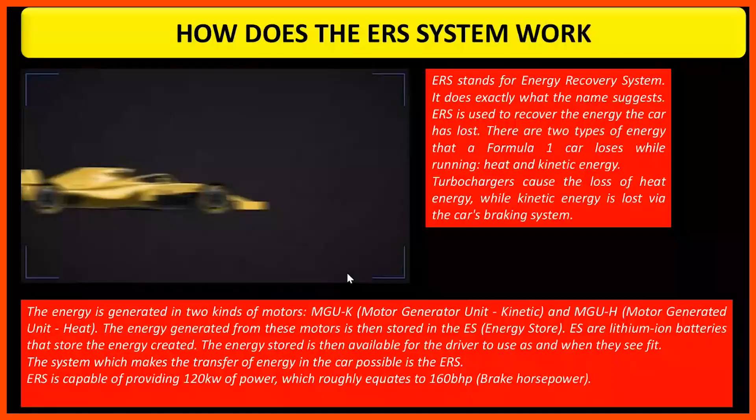Now, your car's MGU-K, like all the typical kinetic energy, how it works on the vehicle: when you brake the vehicle at sharp corners, the energy is recovered from the gearbox, that is your crankshaft, and at that time when you apply the brake, your electrical clutch disengages, and at that peak rpm, the car would have run around 8,000 to 10,000 rpm. At that peak moment, the engine becomes a motor, and in that engine there is a motor generator unit integrated through gears, which converts that rotational motion into electrical energy and sends it to the MGU-K, which is kinetic, and MGU-H.

So MGU-K is nothing but the normal unit which we are using in typical electric cars or a conventional ICE engine vehicle. When you apply the brake, the clutch disengages, but still your flywheel rotates at a peak RPM. At that time, if you connect a motor or any gears to a motor, this mechanical energy will drive that motor, and this is converted into electric energy. If it is in a typical conventional car, think about the motion or the speed at which the electric or F1 vehicle flywheel rotates. That is converted into electric energy and saved in the ERS system through MGU-K and MGU-H.

Everyone knows how the turbocharger works. A turbocharger starts functioning above 2000 rpm. So at less than 2000 rpm, the pressure is not sufficient to rotate the fins of the turbo, and it will not recirculate the exhaust gases to EGR. And in Formula 1, turbochargers are used to have the engine easily breathing. It's like a breathable system.

So now in between the turbocharger, there is a motor connected. Ideally, in a turbocharger, we have an exhaust and an inlet. In between, there is a shaft separated with oil, and on that shaft one side will be in suction motion, one will be in exhaust motion. So in between that shaft, there is now a motor which operates electrically. The turbocharger now operates electrically whenever required.

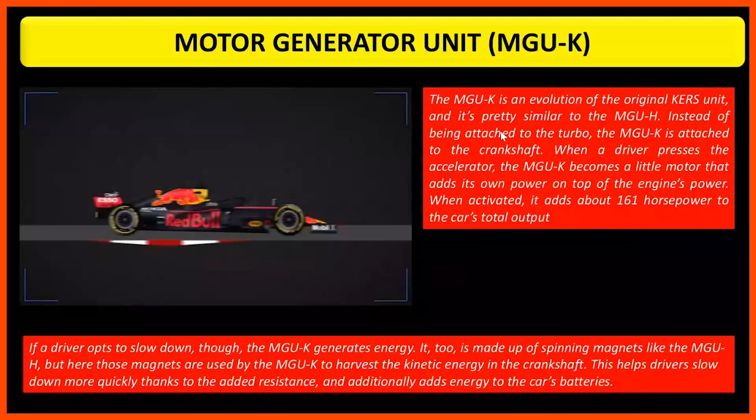Now MGU-K and MGU-H, so braking power. MGU-K also, when the car is braking, generates current from the crankshaft. Two energies are recovered now. So this is how it works. With the turbocharger, you can see the air flowing over the head of the rider. On the left side is the head of the rider, where the air enters, goes inside this and goes to the engine. That time the turbocharger rotates.

This is the motor in blue, which rotates through the airflow itself and sends the power to the battery. And the red one is your MGU-K motor, which is connected to your crankshaft. While applying the brake, the clutch is disengaged. The flywheel motion is converted into electrical energy and saved to your battery. So two energies have been recovered.

Now, think about the scenario for a driver. When the driver is going into the corner, the braking energy is converted and saved. Till he approached that corner, the MGU-H unit, the turbocharger, would have rotated and saved the current into the battery. Now the usage comes. On the exit of the corner, you can see in a Formula One car the turbocharger will not stop. The beauty lies here. Now, the stored current will rotate the turbocharger electrically.

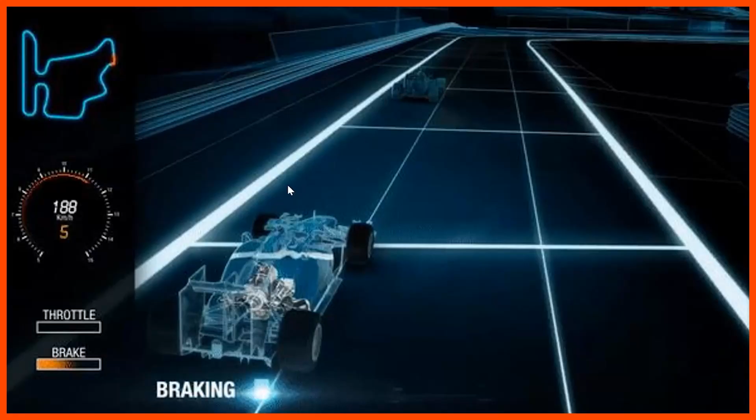On a higher speed on a highway, the ICE engine or fossil fuel power is always recommended as more economical rather than complete electric. That time this clutch engages and the motor becomes a generator. That power will be sent back to the battery and it charges. So based on the requirement, this is how this hybrid layout works in a commercial vehicle.

It also has an inverter system which acts as a step up and step down transformer. When power is flowing from the armature coil to the battery, it steps down and slowly charges the battery to have cell balancing and ensure the battery is not damaged. And when the vehicle uses electric current from the battery, it steps up and gives the required high voltage for the transmission to drive the vehicle. It is a Bosch smart inverter, which is being used with commercial vehicles.

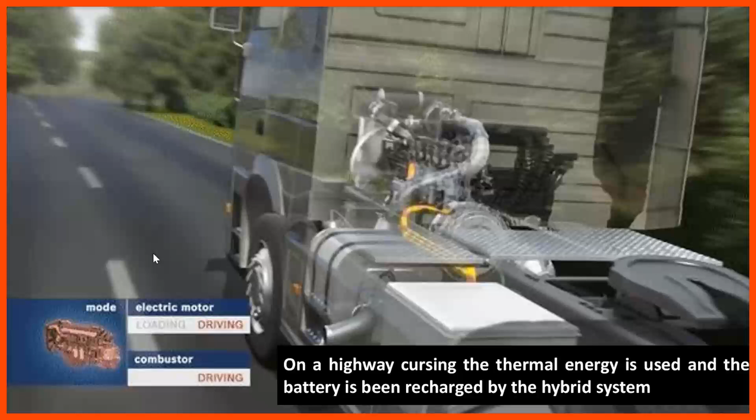So on a highway, the thermal energy and the electric motor both drive to give combined power and fuel economy. And in a city tight traffic situation, the combustion motor, the ICE engine, will not work. It will work on the electric motor. So with this, we are entering into battery management, power control management, and thermal safety.

First is your battery. There are different batteries used in electric vehicles. We have seen only lithium-ion. There are a few more batteries which have been used, like nickel metal hydride, nickel cadmium, lead acid, and solid state batteries. These are the typical batteries used in electric vehicles so far.

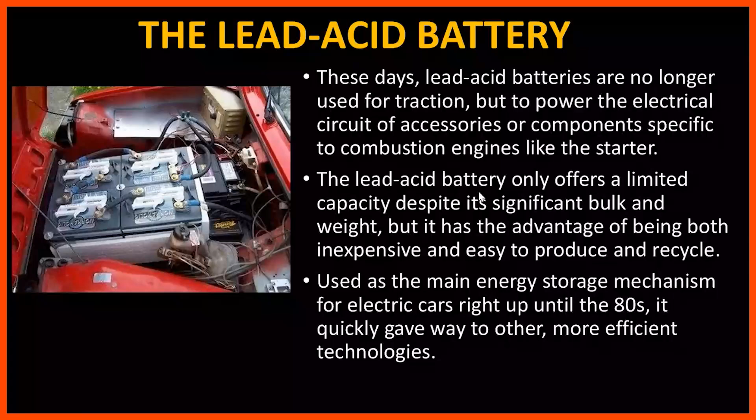Lead acid battery is something we used in earlier stages, and it is heavier, which adds weight to the cars as well. And thus, we moved on to a maintenance-free battery, which is MF. Lead acid batteries are still being used, but they are not as efficient compared to maintenance-free or lithium-ion batteries.

And nickel cadmium batteries are still being used on a rechargeable basis for short-term power supplies. In factories, we use them for supporting the machinery, and we also see them used in remote control cars that kids play with. So this is nickel cadmium.

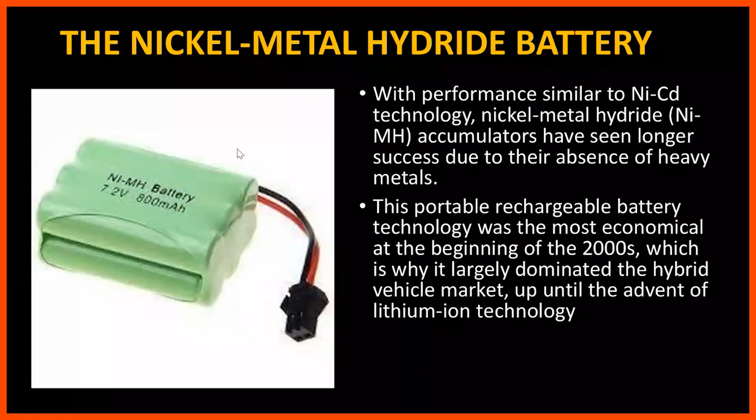Nickel metal hydride was a developed version of nickel cadmium, with a longer range, and it was used for a longer time, but it was still a technology of the early 2000s period, and then we moved into lithium ion.

Ultracapacitors are also used in various automotive applications like jump starters, a power bank-like component. It's very compact, but it starts up the battery of a car. It has high storage capacitors which instantly deliver a high current for a short duration. So it is not for extended use, and it has a life of 10 lakh cycles, where 10 lakh times it can discharge the current in one instant.

So this is also used for high power charges, like jump starters or high power electric vehicles, or for commercial usage in factories where you have robotic arms doing spot welding in the manufacturing line.

Solid state batteries. This is for limited usage. Still, EVs are using solid state batteries. We come across very low maintenance or lower cost EVs having solid state batteries. But the drawback is there is no heat dissipation. Either the batteries have a much lesser range, which you can swap, and also they have poor heat dissipation, a poor thermal management system in the battery.

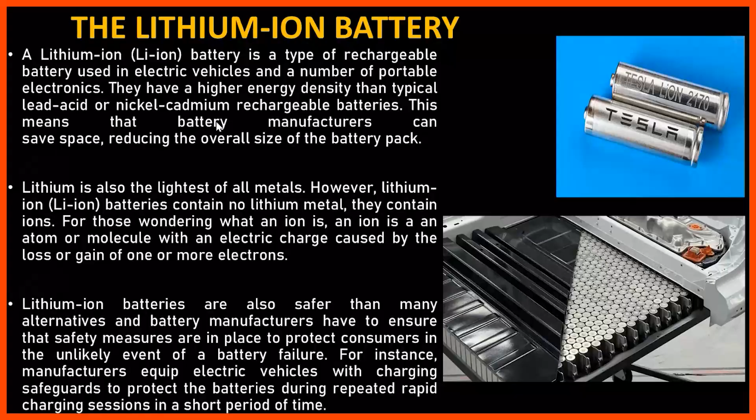So when you come for an EV, what will be the lifetime? The ideal lifetime of an EV is 4 to 5 years because battery degradation happens after 4 to 5 years. On average, it's not high degradation, but it starts degrading based on the usage as well. So batteries still last, but degradation starts from 4 to 5 years in a slight manner, which is 5 to 10%.

Most of the batteries, even if they last 8 to 12 years, at less than 70 or 80% you can see a drop in your performance, where it's recommended to replace the batteries.

So, charging cycles. Many consumers don't understand this concept in the EV ecosystem. Someone new to EVs or a new buyer of an EV does not understand the charging cycle. They think when I put it on charge, it should charge all the cells immediately. It does not happen that way. It's like a current flow.

When you pour water into a bottle, the water reaches the bottom level first and evenly spreads. Even if you pour water into an ice cube tray, it supplies water to all the ice cubes. Once all the ice cube bins are filled, only then it levels up. The same happens in a battery. The current flows and cell balancing happens.

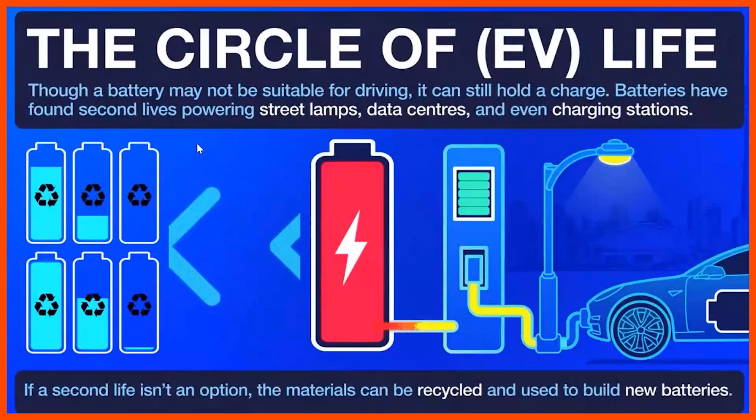So with lithium ion, the main reason people go for it is that it is recyclable. After a while, lithium ion is sand. When you recycle it, when you separate the chemical and metal, it's sand. But even if it is sand, the chemical cannot go into the mud; if you put it in mud, it will have some chemical nature in it.

So the recycling process of the electrode has pre-treatment and a hydrometallurgical process. The spent lithium ion batteries, which are completely discharged, go for a pre-treatment where the plastic and metal shells are dismantled and the batteries are crushed so that you can separate the plastic, metals and chemical components. The cathode and the materials from the collector will be separated.

The screening happens, and ultrasonic washing is done because there can be radiation or other external chemical fumes, and then it goes to segregation of plastic, electrode materials, aluminium, ferrous material, copper, everything. Then it comes to a hydrometallurgical process where, in organic or inorganic acids, it undergoes a treatment where it becomes raw material, and chemicals and deposit solvents that are not required are extracted out.

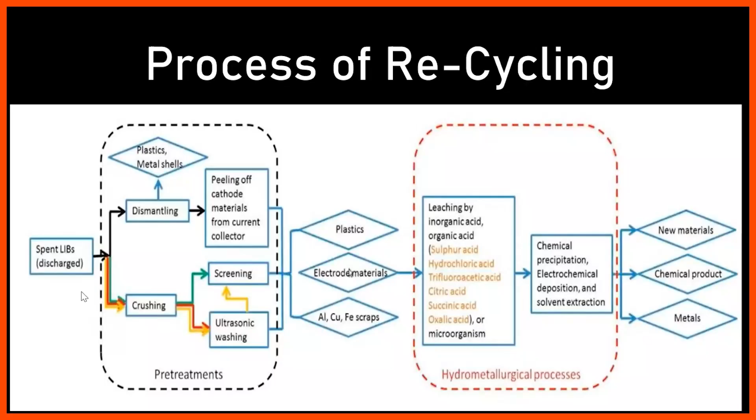Battery management system. A battery management system is required, just like we have an ECU in a car or a motherboard in your CPU to tell you what the temperature is, what your charge is, how long it's running, what the processor speed is, everything. A battery also needs a management system.

And why are the batteries placed in the base of the vehicle? You have the front, the trunk, the roof, the doors. Why is it not placed there? In electric vehicles, we need a center of gravity and man maximum, machine minimum. This is the philosophy followed by Honda, a four-wheeler brand. EVs also follow it, because the human has to occupy the maximum space and the machine the minimum space, as well as you have to have a center of gravity.

The batteries are placed on the floor. Also, heat dissipation is very efficient when the battery is on the floor instead of keeping it as a pack in the boot or the front. When it is on the floor, due to aerodynamics, the air passes through the bottom of the vehicle and dissipates the heat efficiently. It's a natural heat dissipation system.

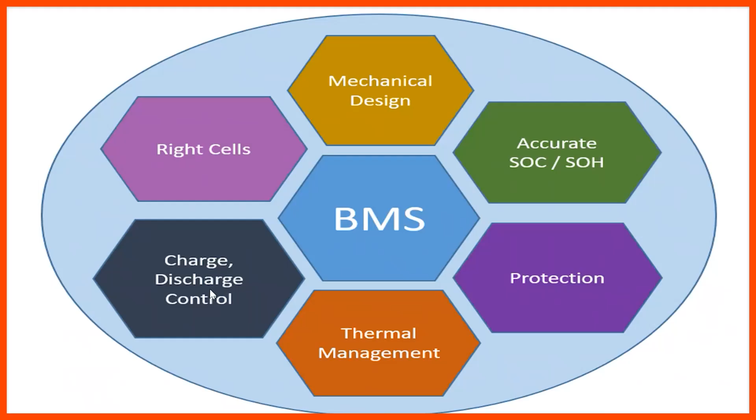So how the battery management system works: in a car, there are different grids of batteries, and in each grid multiple cells are placed. Each cell is monitored by an individual BMS connected to the main BMS. So in a four-wheeler, when grid 2 cell 14 has an issue, you can easily identify which particular grid is affected and has to be replaced. That is how the battery management system helps.

So why is it needed? As I explained, when there is a service requirement or maintenance, we need to choose the right cell, see which cell is affected, and get it repaired. In future, there is also a technology where you can have the battery replacements done.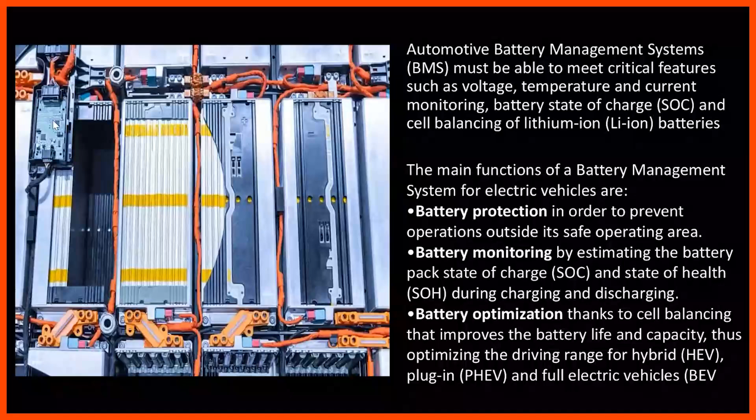So when the vehicle is turning right, the outer wheel will rotate at a higher speed and the inner radius wheel will rotate at a lesser speed. So in between there is a differential in the axle which controls the propulsion.

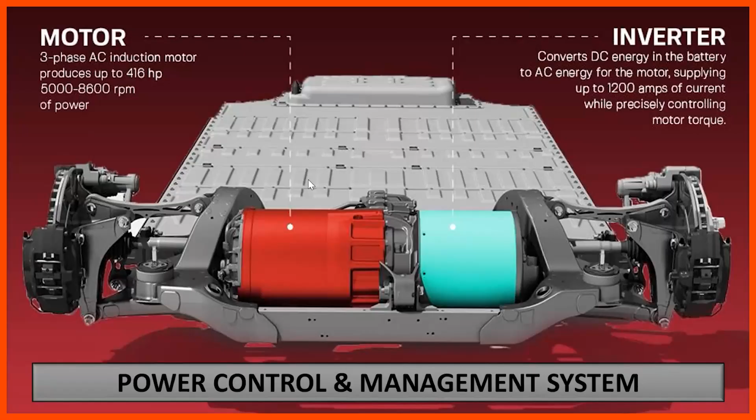Current from the motor, when it's slowing down or braking, is AC current, and it converts it into DC and sends it back to the battery. So this is how this smart inverter works, and it also supports moving the vehicle at a higher speed whenever required. That is why Teslas have instant torque and instantly attain speed. And this has been explained in the previous slide also.

So, battery integration. As we saw with the center of gravity, this is how the battery is integrated with the chassis. So the chassis has an integrated battery, which has a heat dissipation system on the floor, which naturally dissipates the heat and also acts as the center of gravity.

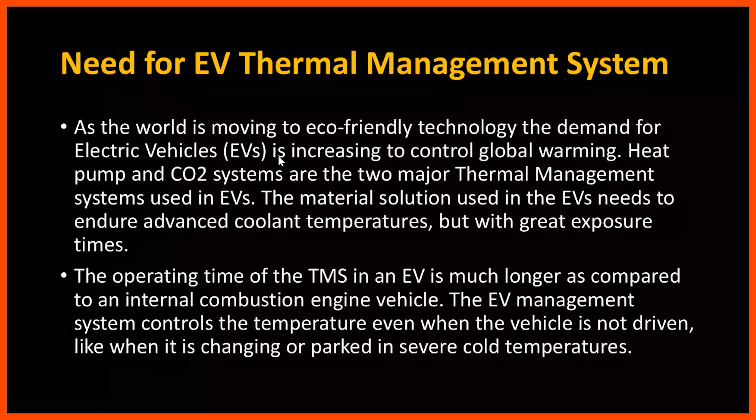And coming to the thermal management system. So in an EV, we need a thermal management system to monitor the battery because continuous usage will have the battery generating a high amount of heat. High heat generation can also affect the circuits inside the batteries and also other electrical systems. So we need to maintain an optimal temperature.

So 48 modules. When you place a battery like this, heat dissipation for the laminated batteries is higher, whereas heat dissipation in cylindrical batteries is less.

That is why your phones have laminated cell batteries where the cooling is immediate. But you cannot place a laminated battery in your four-wheeler because cells are stacked one over the other, and you cannot have a standard cooling system where the battery at the bottom level gets proper dissipation, unlike the battery at a higher top level. So cylindrical batteries are efficient because they are on the surface, so they get cooled and air can pass eventually to all the cells.

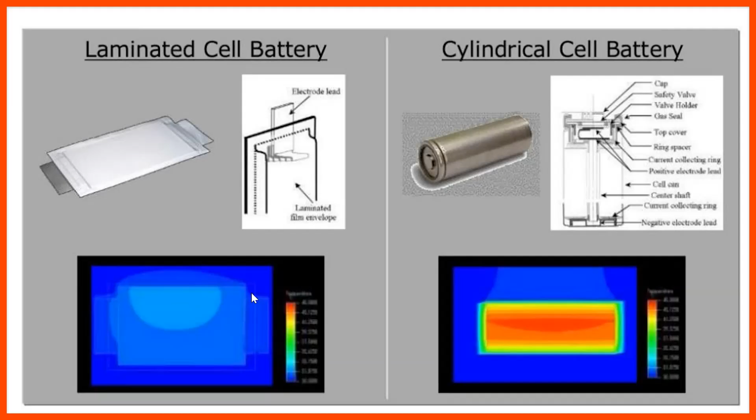So that is how the cases are being designed with grids, similar to how in an ICE engine, the engine head has fins to have a compressed cooling heat dissipation. Same way, the battery cells are also being provided with grids.

In some cases we have a Heating, Ventilation and Air Conditioning system, HVAC, which dissipates the heat from the battery outside. We have a separate cooling system, similar to how air conditioning works in a car, which pushes cooling air in and brings out the heat. That is how Volvo and higher end vehicles have a separate heat ventilation system for batteries.

This is one cooling system where you have a turbine fan, like a turbocharger ideally, which pushes in cool air and pushes out the hot air. Whenever the sensor senses that the battery is at higher temperature, this fan gets turned on, which sucks in cold air from the vehicle moving forward, so that compressed air moves inside, and the hot air from the battery dissipates out automatically. This is a very simple thermal management system.

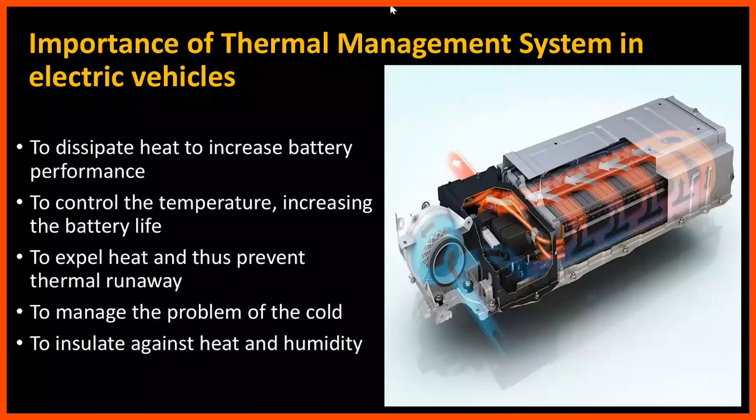Last, closing with the charging infrastructure and the advanced systems.

Charging infra of Tesla: the concept is like buy a vehicle and drive across the country with free charge. It's not a selling point, but more like a subscription - similar to how you buy an Apple phone and need a subscription for Apple Music or Apple Play Store. As a Tesla customer, if you're subscribed you can use the charging stations, and you still have to pay if you are not subscribed. This is a selling pitch used in foreign countries, and they have both DC and AC charging stations, along with an onboard charger that the consumer has. So these are the two types of charging typically.

The difference is based on the power flow and rate at which the charge is achieved. So in general, we have Type 1, Type 2, CHAdeMO, and Type 2 CCS chargers globally.

Type 1 charger is your AC charger, which has 5 pins, used in two-wheelers, which can support up to 11 kilowatts, 230 volts, with current rating up to 32 amperes. Type 2 has a 7-pin charging plug, installed at your home exclusively by the brand, which is 5 times faster charging, up to 400 volts - a fast charging option, ideally for the Indian market.

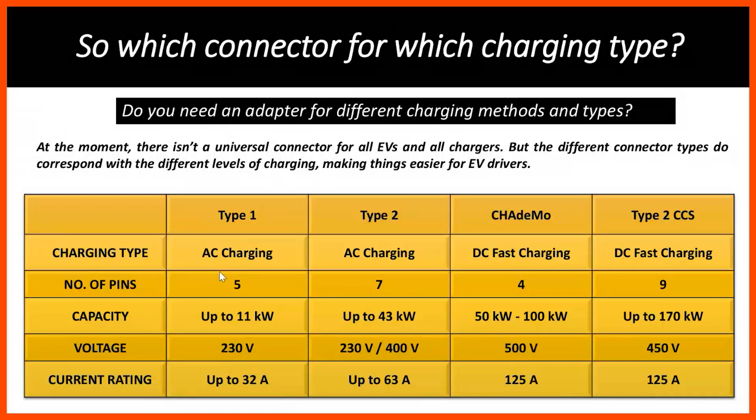CHAdeMO chargers are found at a charging station, with 4 pins, supporting up to 100 kilowatts, charging within half an hour to 40 minutes. Type 2 CCS combined has 9 pins, which can charge instantly within 15 to 20 minutes. CCS combined is a charger type that allows a vehicle to charge both in AC as well as DC based on requirement. The manufacturer provides a vehicle you can charge both ways - it's like having two slots in your vehicle, one for AC, one for DC.

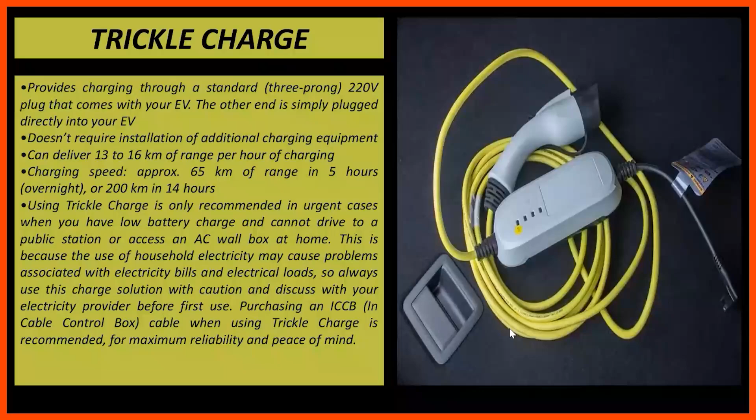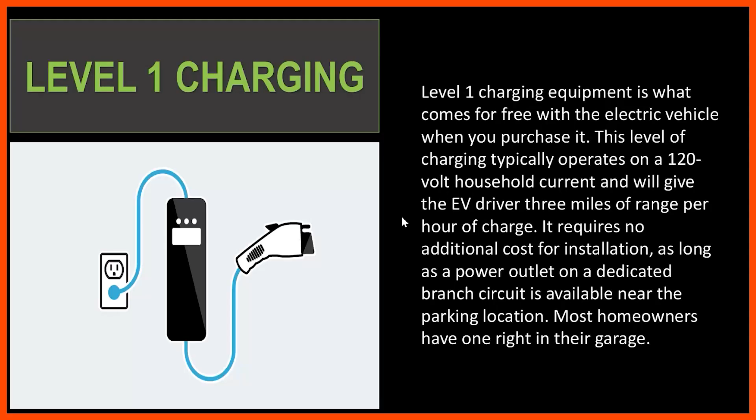Level 1, to make it easy for understanding, I have added multiple images so that it is easy for everyone.

Yes, someone raised your hand. Yeah.

Yes, someone has raised their hand, I think. Anyone want to ask questions? No, can I come to that after completing this? Yes, just a minute, I'll complete it. We'll go to the question session.

And charging socket, this is the 7 pins. So EV charging sockets have an RCD, residual current device, so we call it PRCD. What the PRCD does is deflect potential residual currents. Like when you plug into a socket, there is earthing, and the high current goes to the earthing. It will not come directly to your product or instrument; it will protect the system. The PRCD and RCD are built in. So every EV charging socket has an RCD, residual current device, so that it protects the car or vehicle battery and the vehicle from short circuits.

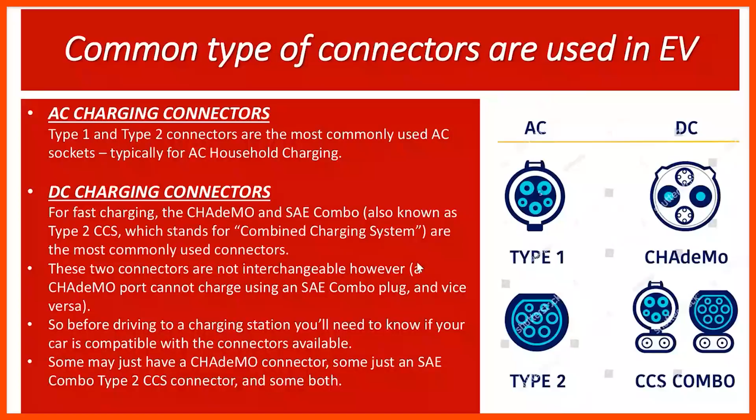And these are the types of AC and DC chargers. AC Type 2 has 7 pins, AC Type 1 has 5 pins, and DC chargers have a CHAdeMO, and DC chargers also have a CCS combo where you can charge your car with AC or DC current. So the manufacturer provides the car with two particular slots. This was taken from the global markets. Like Japan has a standard system of AC and DC charging plugs. So any manufacturer who sells a vehicle in Japan, China, and America has to follow this pin standard. That is why they have a charging infrastructure that has been standardized. All vehicles with AC current in Japan have this type of charging pin only, so they can go to any charging station, AC or DC, and charge it. All has a type.

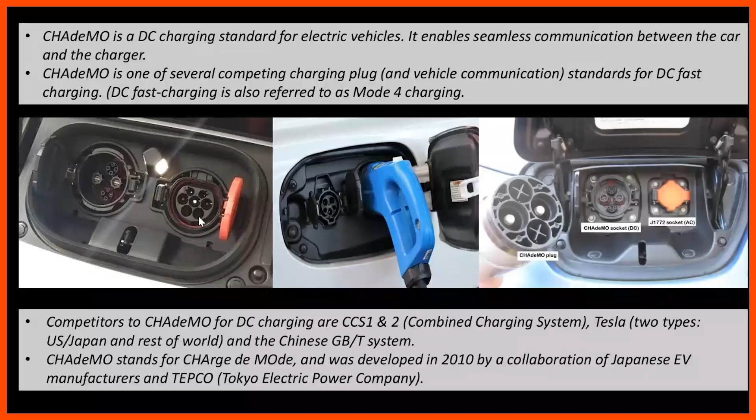So the requirement for a charging station is a transformer, an 11 kilovolt cable, supporting equipment, space, and a government authorized license. We are still in progress in India nationwide for EV infrastructure. So presently we have range anxiety and we don't have an established or proper charging infrastructure. And for solar, it's very cheaper, but maintenance has a higher rate. So you can see many charging stations where a solar grid has been fixed, and during daytime it charges, and whenever it's available, the cars can charge from the solar. Maintenance is high, and power storage is also less, because it can support only one car per shade of solar charging station.

Advanced systems, moving on to EVs - augmented reality, AI systems. So AR and AI integrated systems where there is driverless, automated systems which are semi-autonomous and autonomous driving - that has been a new trend. Common features in EVs: navigation assist, auto parking - now the vehicle parks by itself with 360 parking and sensors. And theft lock, service records, everything you get on your mobile apps.

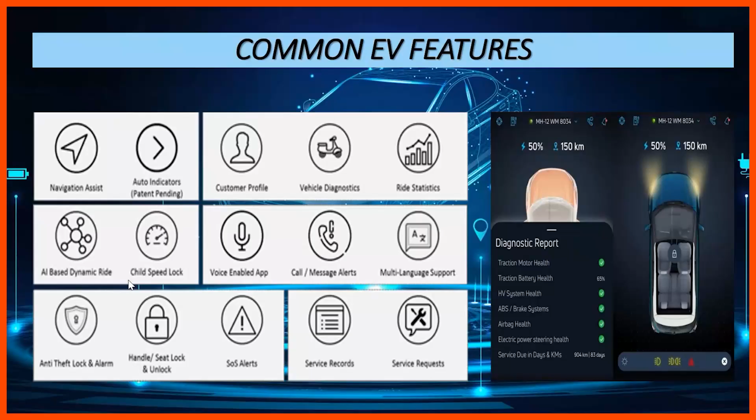What features do car buyers want? If a car buyer needs technology, the latest one, they will go for a new car. Standard tech features are nothing but smart app connectivity, rear cameras, and hill assist. But a techie car buyer will look for a user-friendly system, integrated systems which can seamlessly integrate with smartphones, heads-up display, fingerprint profiles, and parking assist - voice operated systems. And also nowadays you can see cars removing side mirrors to reduce aerodynamic drag. Instead, you see cameras there, displayed inside on the left or right panel like a display screen, so the rider can see the real screen without needing side mirrors fixed there.

Other technologies are connected vehicle technologies. Now your car has connected vehicle technology, and another connected vehicle can communicate with it. Similar to truck drivers abroad who use walkie-talkies to communicate with each other to overtake.

Or if the trailer has not been tucked properly, or there are any loose straps. Likewise, each car can communicate with others, and if you are overtaking a car, it will sense this internally and a signal will be sent to the other car to alert them.

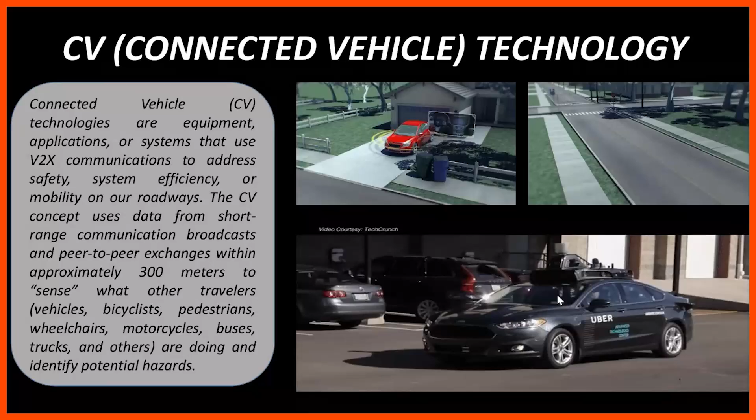Yes, so this acoustic and optical warning stops your car even if you accelerate it forward.